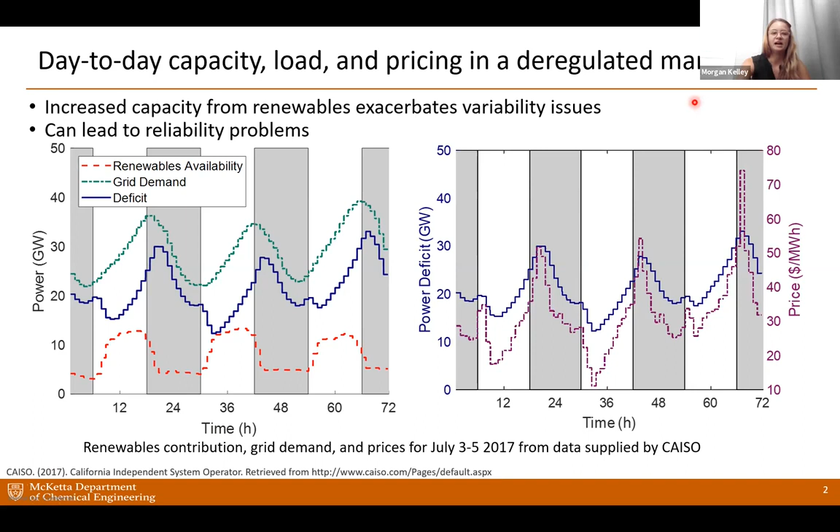This is kind of what happens in an extreme example I'll go over. In February 2021, there was a really big winter storm in central Texas. It was 140 hours below freezing and over 6.5 inches of snow in Austin, Texas, in the supposedly subtropical city. If we look at what happened on the grid in this extreme weather event, the snow happened the night of February 14th.

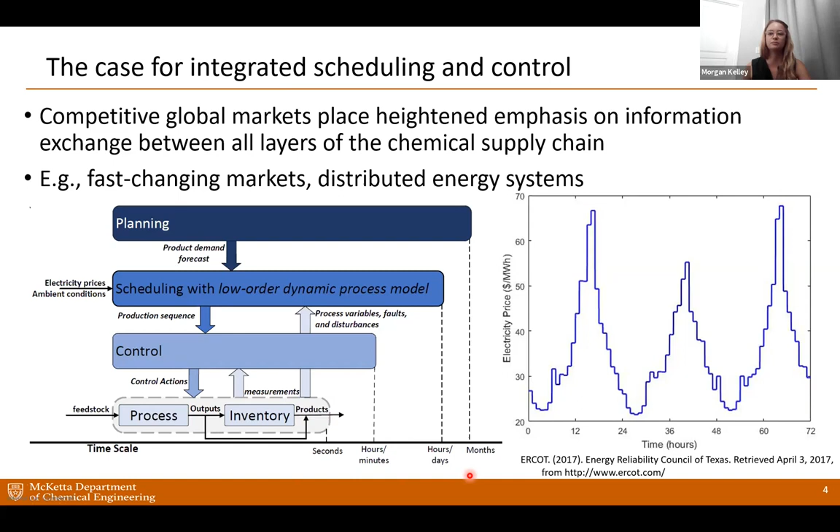So overall, this is kind of what it's going to look like. If we shift when we use demand for an industrial consumer, we're basically going to shift the demand curve and help alleviate some stress on the grid.

So in order to be able to do this, there's a few things. We need to make frequent scheduling changes. We need to account for process dynamics. This is because, sure, you can curb your power usage, but you might be exploding or overflowing something at the plant. So you want to make sure that you can actually make these changes safely. So you have to really accurately model the plant.

So we make a few assumptions. We assume that we can store the product safely and effectively, and that we're able to make these fast transitions. So the requirements for our problem is that we want to account for plant dynamics and ideally solve the calculation in less than an hour.

That's the rate at which electricity prices change. There's also a 15 and a 5-minute market. So under 15 minutes would be great as well.

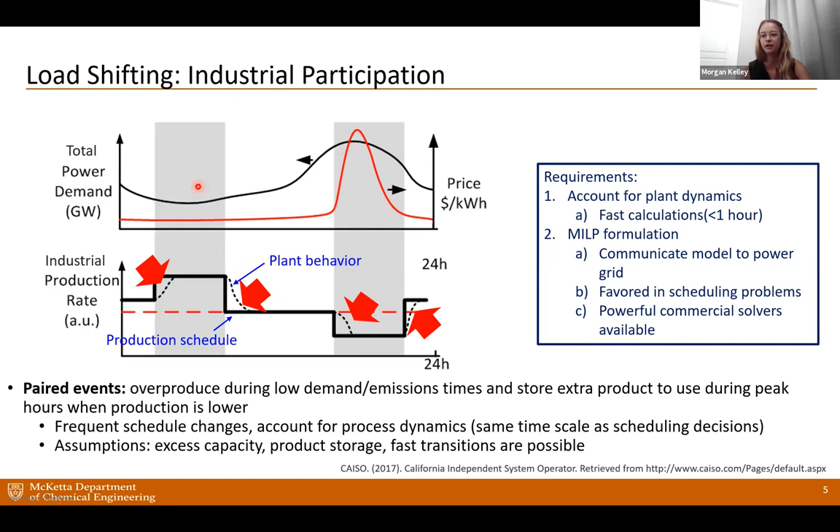We're going to solve the problem as a mixed integer linear program, which basically means we make a series of decisions throughout the time period. And that's because that's what model the power grids are on. That's their format. And so we want to make sure that these models are able to link together. And there's powerful commercial solvers available for these as well.

And so you can see this is our step 1 here to go down. The next instruction is to step up for the following hour. And our plant hasn't actually settled yet. So that's why we need to make sure we have a really accurate model to predict what it's going to do, because our plant is no longer in steady state operation, which means we're basically not operating at the same level every day. So these things we need to make sure are really stable transitions.

The struggle with these models is that they're highly nonlinear. They're stiff, which means they include multiple timescales, such as hours, minutes, seconds, and things like that, and they're very high dimensional. So to represent these, I've used 2 time grids. The first one is represented by index I, which is essentially every hour. And then index J is the minutes or seconds within each hour, just depending on the model.

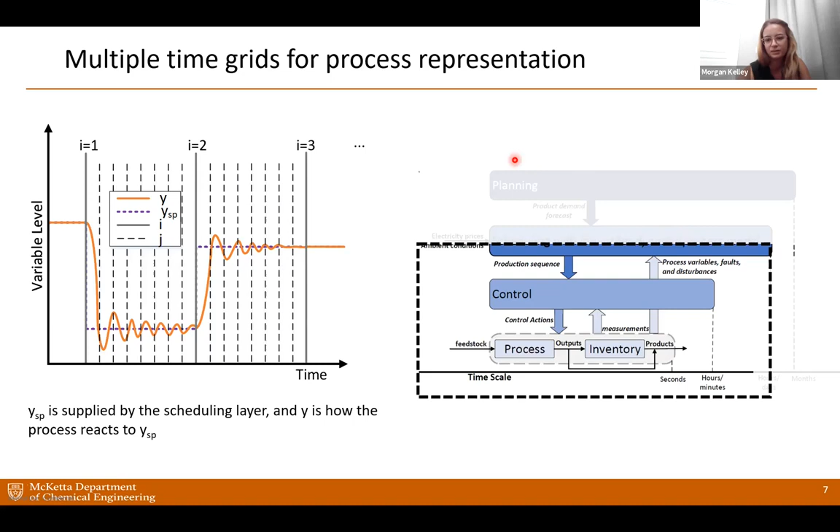So this is kind of a zoom in on what these 2 levels look like. So the control layer basically tells the plant what to do, and the process will do the actions and feedback information to let it know kind of where the states are at.

So to represent these multiple timescales, we use scale bridging models. These essentially bridge disparate timescales between scheduling and control.

So essentially we trace, also I think I'm echoing, so maybe I don't know if somebody's not muted.

But yeah, so basically the scheduling here, so the output from the scheduling level is traced to the total output from the plant. So this would be maybe like what levels we're going to operate at, so our flow rate or things like that, and the quality variables are how pure the product is.

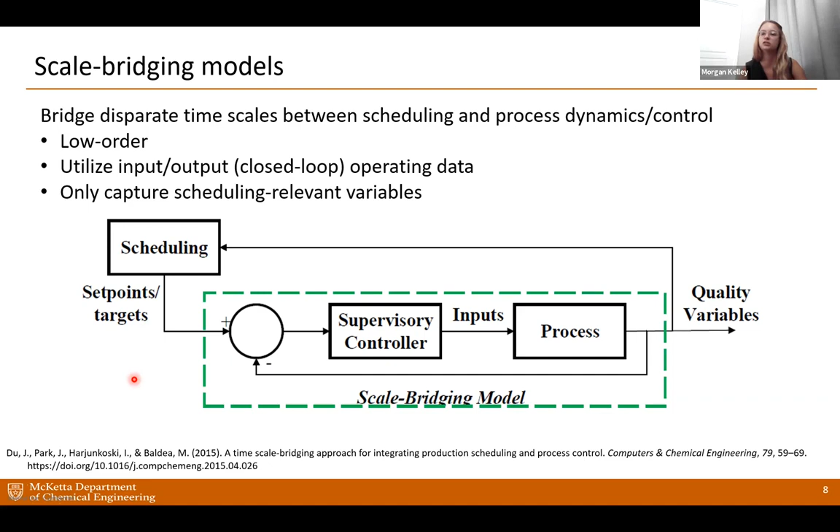So we're able to actually create one model that's driven by data, so we can get data directly from the plant and fit a model on it. We don't need to use differential equations and things like that.

So this is kind of the overview of what that problem looks like. So essentially we have our sub problems here, which would be every hour. And they're actually linked to the following hour with one constraint.

So if I were to be walking across a room and the first minute ends and the second minute begins, our time is continuous, right? So I'm going to be in exactly the same spot that I was the previous minute, right when that second minute hits. But in programming, the time is not continuous. And so you have to actually tell the program where you are in the room, essentially.

And so in this case, we have these complicating constraints, which essentially means that we have to solve this problem sequentially. So we solve for hour 1, we say, okay, where are we as we're walking across the room? Okay, we give that information here, and that's our initial condition for the following problem. This makes the problems really slow to solve because we can't do them all at once.

So things like that. So essentially what we've done is we've removed these complicating constraints and we actually penalize them on the objective function.

So now I'm walking across the room, the minute passes, I can be anywhere in the room, but the distance from where I am and where I should be is actually subtractive from the objective. So we found that essentially we're penalizing our invalidating of the constraints, and we're meeting those.

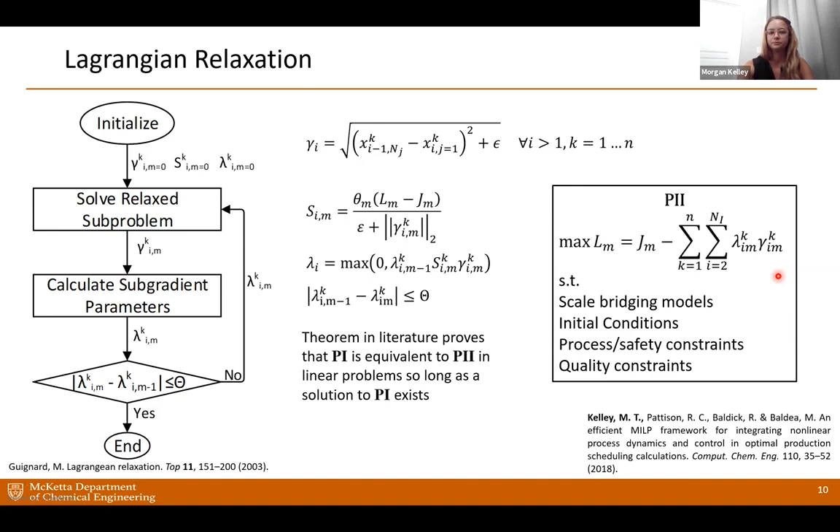So this is a small case study I did. This is a cryogenic air separation unit. Essentially your feed air comes in, it gets compressed, it goes through a heat exchanger, and it's liquefied here, so it can be cryogenically separated.

Our main products are liquid and gaseous nitrogen. Any product that's not used immediately is liquefied again and sent to storage. This is where that demand response comes in - we can actually overproduce and store the product.

The industrial gas sector is a really viable contributor for demand response because they account for about 2.6% of industrial electricity consumption. There's only one feed, which is air and readily available, plus electricity, which makes it really easy to zero in on the power usage.

The longer time horizon you use with these demand response problems, the more savings you can have. So if you look at a 3-day time horizon, you can actually overproduce during day 1 for a spike you might see in day 3 if there's an extreme weather event coming. That gives you a little bit more freedom.

The only issue is that as we look forward with more time, we actually get less accurate price estimations. So that's something we try to balance. In all the problems today I'll be talking about, they're just a 3-day time horizon.

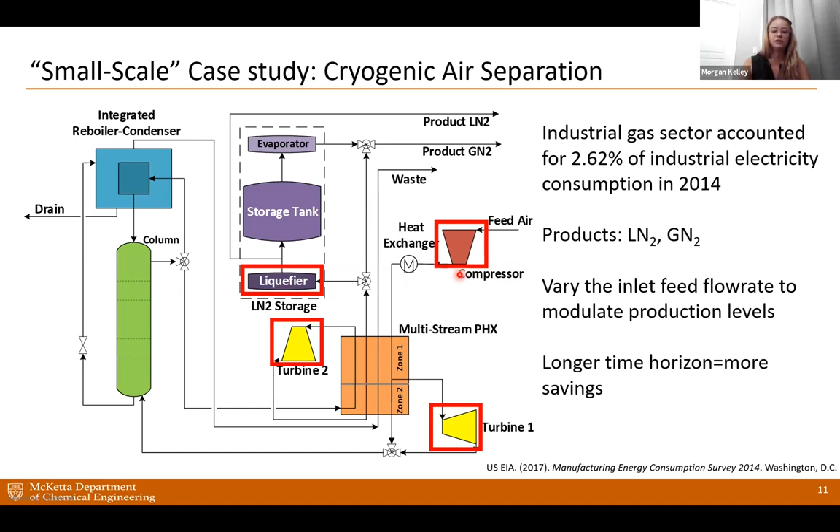The 4 power consuming units are the compressor and the liquefier - those consume quite a bit of power - and the turbines slightly offset this. So this is what's actually driving our demand response.

That took about 95 hours to solve for a 3-day time horizon, so that is completely useless. The goal here was to try to speed that up with these scale bridging models that I talked about. If we use a nonlinear scale bridging model, it took about 5 hours - a huge improvement from 95 hours, but still not where we want it to be.

If we use these discrete scale bridging models with the discrete time points, and we use the parallelization, we actually get down to just over 7 minutes. You'll see there's a little bit of loss in the savings when we use these less accurate models, because we need to impose back-off constraints. However, the slight loss in savings is a very small price to pay for solving it in a reasonable amount of time.

One more thing to point out is that P3 and P4, which are the discrete scale bridging model and the relaxed scale bridging model, come to the same exact solution. The relaxed one actually just takes less time.

Just to give an idea of how big these problems are, these discrete scale bridging model problems have 85,000 variables for the non-relaxed problem, plus 1,500 integer variables - this is just like a yes/no decision we're making - and continuous variables, it was 90,000 for the relaxed problem. Even though the relaxed problem has more variables, it still solves quicker, and that's just because of the parallel architecture of the problem itself.

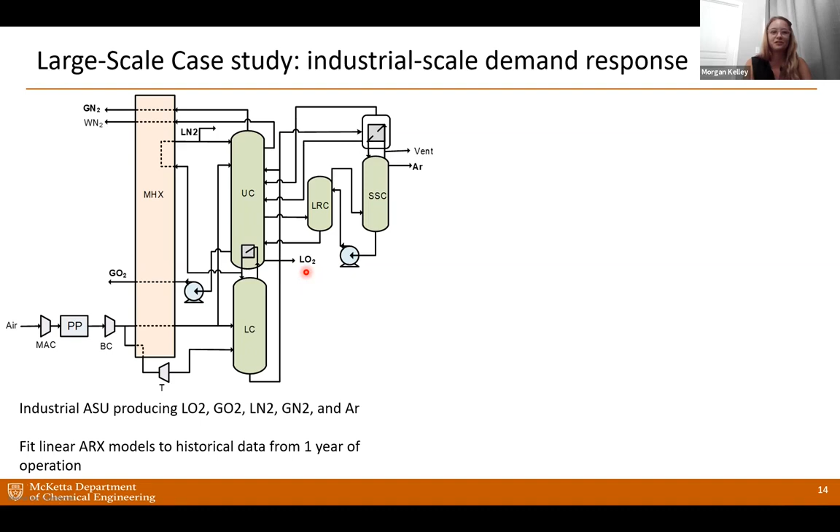I also did a large scale case study. In this one, it's still an air separation unit, but there are more products now: liquid and gaseous oxygen, argon, and liquid and gaseous nitrogen. This is actually a true industrial process, so we had a year's worth of industrial data from a partner, with a data point for every second of the year for all of these variables. So it was a ton of data.

For this, we actually used an autoregressive model with extra input, that's what ARX is. It's essentially just like a standard pole-zero model. The U's are the inputs, things like temperature, production rate, anything you can set yourself in the plant, and the output Y would be something you can't set, like the purity of the product.

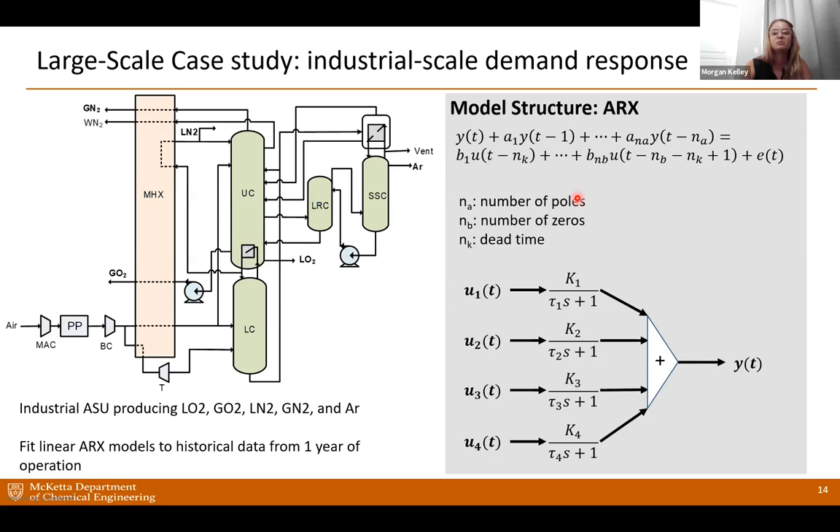So this model looks a little bit different than the one I talked about before. It actually looks back several time points, so those complicating constraints, the continuity constraints, get a lot more complicated in this case. However, these models are entirely linear, and they can be fit better to this industrial data.

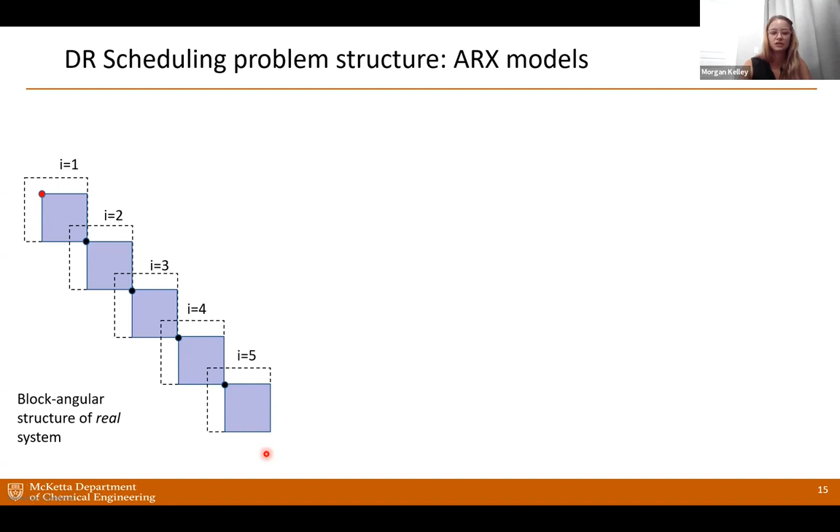So this is kind of where we started. We have a block angular structure of a real system, which means that at the end of hour 1, I'm exactly where I will be at the beginning of hour 2. In that snap instant of time, nothing has changed. So these problems have one complicating constraint per time interval, and we're able to reformulate the nonlinearities pretty regularly.

This was something I found interesting when I was doing this. This is my first time working with real industrial data, and our key challenge here was that nothing is perfect. Our data-driven models actually inherited any measurement errors in the plant. In this case, there were a few sensors that were off or biased a little bit, and we can't really go back in time and get better data because this was actually a year's worth of data.

So what we had to do was basically realize that our mass balances aren't closing, not because there's a leak in the plant, but because the sensors aren't working. A mass balance would essentially say that everything going into the system is coming out minus anything that's been lost or accumulated within the system. So you put a certain amount of air in, and there's a certain amount of oxygen in it, that same amount of oxygen should come out somewhere in the process. That wasn't happening, and we found that it was due to some sensors.

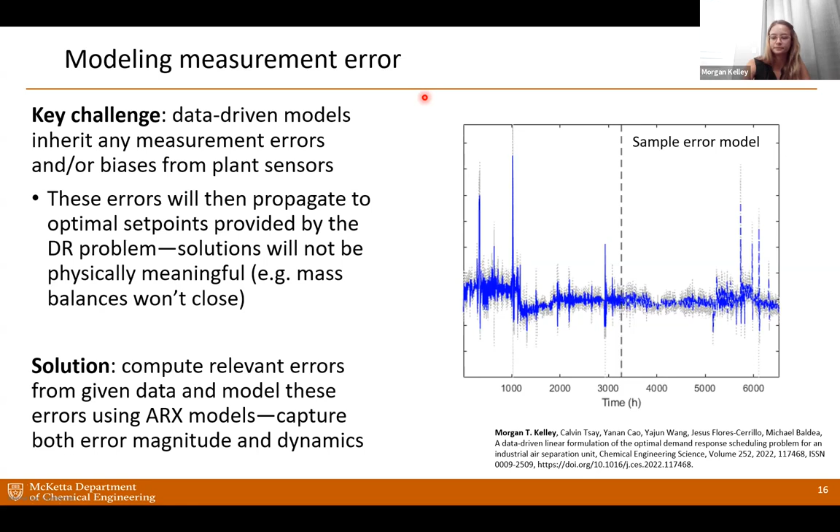But yeah, it matches up pretty well with the industrial data, which is gray in the background. And this line here is our train test split, essentially. So if we look at the solution of the problem, we get a few interesting things.

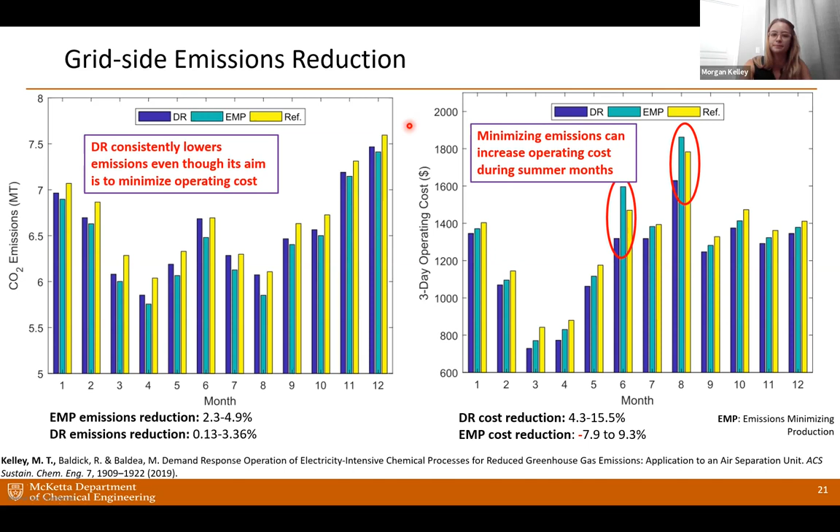So for conclusions and future outlook, demand response has huge potential for mitigating grid instability and reducing emissions, and it will also save companies electricity costs. And this isn't just for during extreme weather events, this can be just on a normal day. It involves little to no capital expenditure, so there's primarily changes in operating habits.

In this problem, we assumed that the storage tank could hold a day and a half of operation, which is pretty standard for these air separation units. Recent advances in computer technology, models, and algorithms actually enable efficient solution of these problems. Even during the 5 years of my PhD, I saw significant improvements in computation just by getting new computers. So that is something to keep in mind.

So for future work, there's a few applications outside of industrial plants. Time of use electricity pricing for residential and commercial entities is already being done. It can be really bad during extreme weather events like the winter storm. Residential users who were on demand response plans got these massive electricity bills. So that's something to consider, that there is a risk in this, especially if you need to be operating all the time, such as a house. They need air conditioning and heat. So maybe a demand response plan isn't great for them.

It does have potential to play a role in remote computing tasks. For example, when you do a credit card transaction, the bank actually processes these all overnight. So we can think, is there a better time of day to do this? This is a large compute task, so perhaps that can be done.

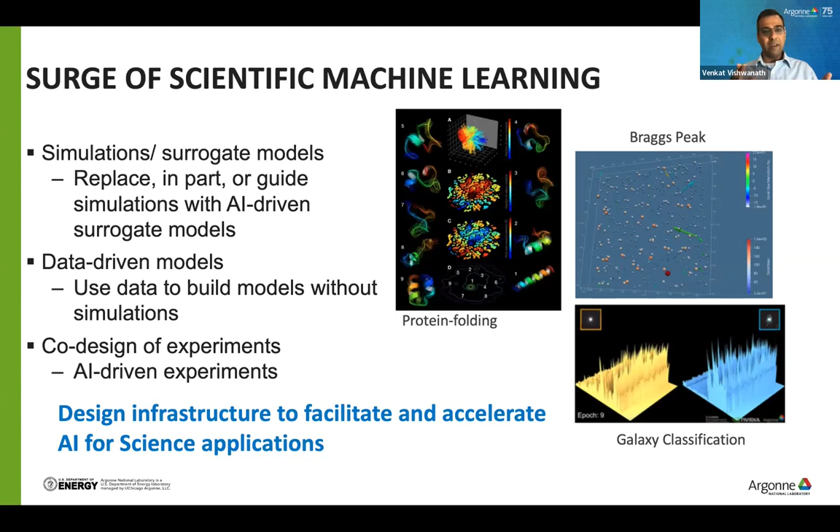We're also seeing cases where AI is being used to really ensure what kind of experiments to run, whether at an experimental facility or in terms of simulations. If you're trying to really search through a space or ensemble, you can do more intelligent ensembles using simulations and AI to really improve the search of the space. Having seen this, our goal is to really understand the kind of infrastructure we need to facilitate this wide array of new scientific machine learning and science application workflows, and build infrastructures and facilities to really meet these needs. I'll be diving into efforts we have in this direction.

So the key goal for us is to really understand how do you design these future facilities, which are coupled together with experimental facilities, together with edge devices, and you have a wide number of simulations and data-driven models, among others, that need to run on it. You can think about AI accelerators that could be resident at an experimental facility, or at the edge between experiments as well as a compute facility, so they could be at the border.

These accelerators could be sitting on a node of a supercomputer, so it could be on each node. You could consider having a disaggregated system where you have racks of these AI accelerators that are connected to the main supercomputer over the network. So our key goal is to really think about how do you design facilities that meet the needs of science applications, and these are a few examples here.

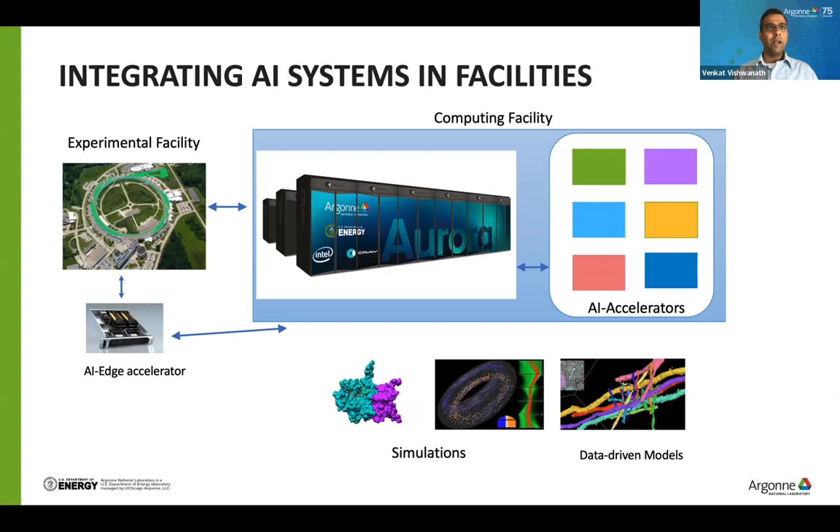Towards this goal, we've been doing a pathfinding effort where we are working to really evaluate a number of AI accelerators and really understand how can we effectively couple these with current supercomputers and future machines, and really design national user facilities based on these novel and new use cases.

As part of this effort, we've been working with a number of AI accelerators to really understand the maturity of their hardware, as well as their software stack for science. And how do we take these systems that have been designed by different vendors and really integrate them into a facility? And finally, how do you really run science on these systems at scale? This is our overall vision of the AI pathfinding, and I'll be discussing more of these.

Towards this vision, we have developed and designed the ALCF AI testbed. As part of the testbed today, we have 5 different systems. We have the Cerebras CS2, we have the SambaNova DataScale system, we have a Graphcore system, and the Intel Habana. Cerebras and SambaNova are now available for allocations for users.